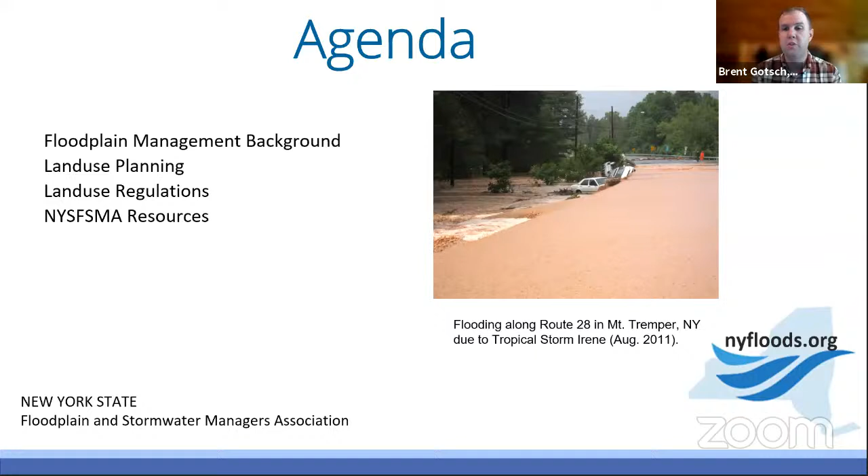The New York State Floodplain and Stormwater Managers Association is an organization of multiple professions working together to make New York State safer, more flood resilient, and better prepared for flood risks facing the state. We really are a diverse organization made up of multiple professionals. We have planners, engineers, education outreach specialists, surveyors. I'm sure there's many others I'm forgetting, but these, in many ways disparate yet collegial groups come together to help the state be more resilient in the face of flooding and better prepared with stormwater management. We do this through several avenues.

We provide training, which I'll talk about in more detail towards the end of the presentation. We also are an advocacy organization. We advocate for good, solid science-based and evidence-based floodplain management policies. We have position papers and write letters to elected officials to encourage them to promote policies that lead to good floodplain management. We do outreach similar to what we're doing today, with other organizations, to talk about why this is an important issue that should be on everybody's radar. And finally, we collaborate with many different organizations and groups of people, all with an eye towards making sure the state is resilient in the face of increasing flood risks.

So why do we do what we do? Well, first and foremost, flooding is the most common and expensive disaster in New York State. It's actually the most common disaster in the entire country. I like to say the wildfires out west, the tornadoes in Tornado Alley, earthquakes—those are kind of the sexy disasters. They get a lot of the press. But flooding, far and away, is the most common natural disaster you're going to face anywhere in the United States, and particularly in New York State.

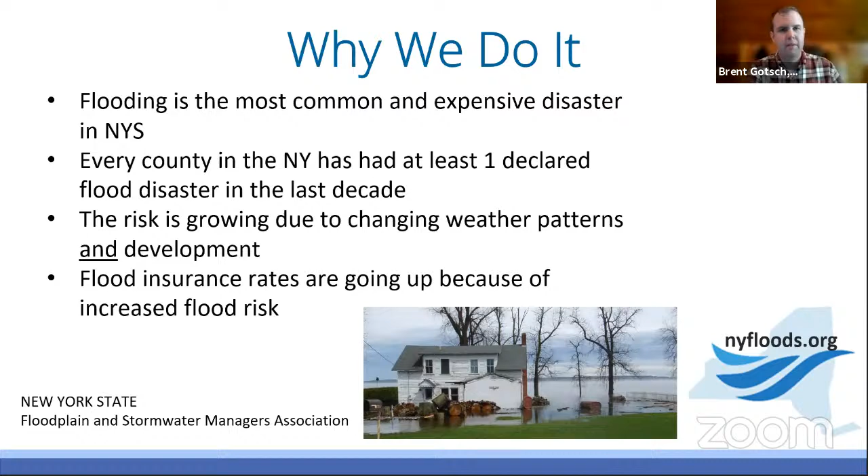The National Climatic Data Center says that the Northeast, of which New York is one of the states, has experienced a 71% increase in very heavy precipitation events. Again, that's a result of climate change. We're having increased hurricanes, larger category hurricanes dumping precipitation on us. You also have rain-on-snowmelt events in the winter and early spring months causing these issues, and heavy thunderstorms even in the summer. These increased precipitation events are really swelling our rivers and streams and making flood events more frequent and common.

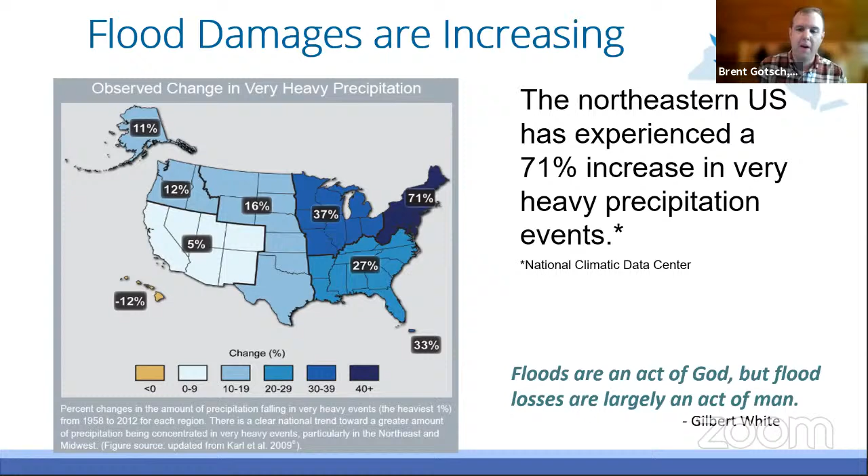But the losses, that's totally on us because we have chosen to put our development into our floodplain areas. Now, we can't go back in time and tell all the folks in the 18th, 19th, and 20th centuries not to build our built environment in our floodplains. We can only go forward. But as we go forward, we need to make sure that we make good land use decisions. That's something we'll be talking about as the presentation goes on.

Why is this? This has to do with more severe storms and the development patterns, the increasing development pressures we're facing, which tend to put a lot of our built infrastructure on nice, flat, developable land—which often tends to be floodplains, riverfront property, waterfront property. As many of you know, that's very expensive property. That's where developers want to build. That's where you make a lot of profit.

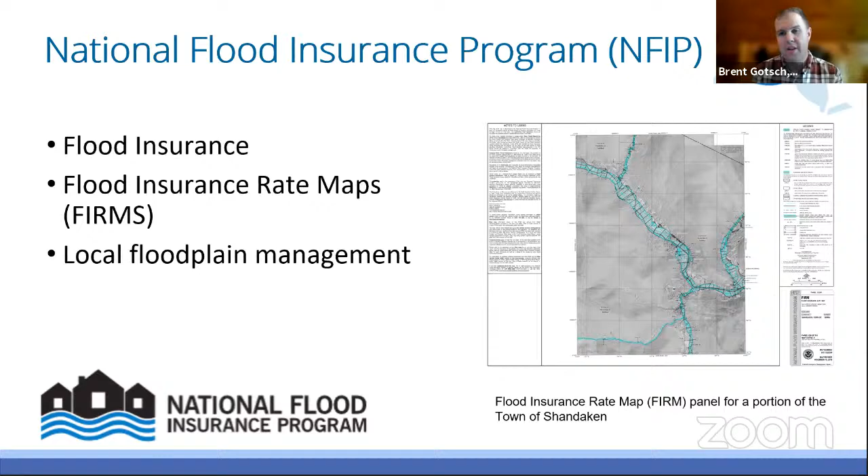The flood hazard maps, or flood insurance rate maps, map the 1% annual chance, or 100-year, floodplain. We try to get away from the term '100-year flood' because I think it confuses a lot of folks. Quick story: in my hometown, the last big 100-year flood occurred in 1928. My grandfather was a little boy at the time but remembers it vividly because it basically wiped out the whole town. When I talk to old timers in the community, they always say, 'we don't have to worry about a 100-year flood until 2028.' I tell people, well, 2028 isn't that far away, but that actually has nothing to do with it.

This is really talking about statistical probability. A 100-year flood has a 1% chance of occurring in any given year. So essentially every year that rolls up, you roll your dice and see what happens. You can have a 100-year, quote unquote, flood happen multiple times in a given year or over several years back to back. Again, this is simply a way of talking about probability. The term floodplain managers like myself, Janet, and John like to use is '1% annual chance,' which I think gets the point across a little better.

The thing about these maps is they show the extent of the floodplain in the mapped areas, but they don't show runoff from new development. If you have new development, you have lots of impervious surface, so water can't infiltrate into the ground. It runs right off into the rivers and streams and can cause inundation in those areas. They also don't show ditches or debris blockages at road and stream crossings. In the area I work, we have a lot of undersized bridges and culverts, and ditches that get clogged with debris, which can cause flooding and a backwatering effect at those locations.

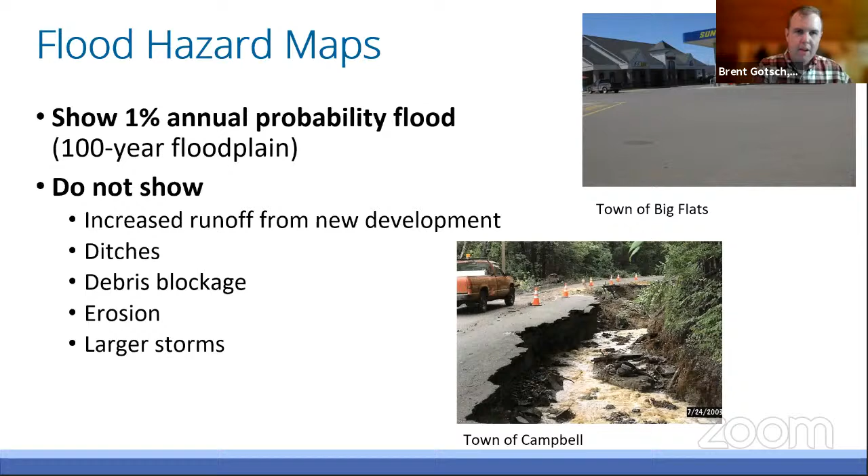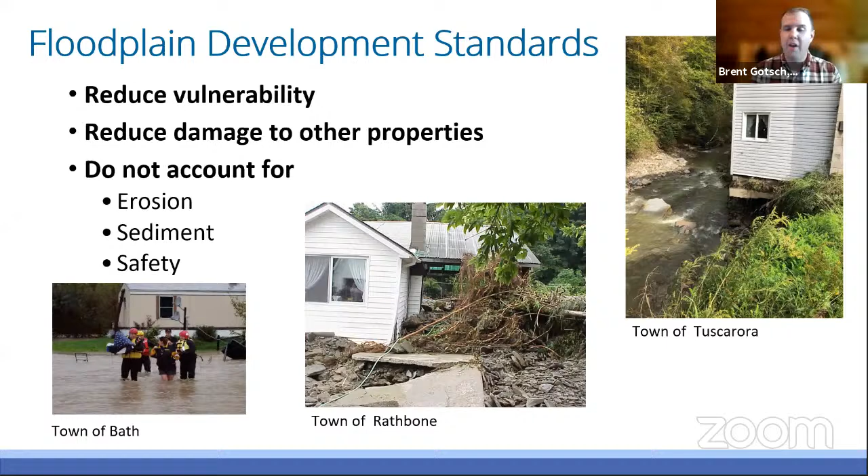Depending upon the velocities of the water, you can move some pretty big material. You can have situations like this where large amounts of sediment can move in and impact structures as well. But again, the whole purpose behind all of this is for safety, right? Safety for human life and also for the properties that are affected.

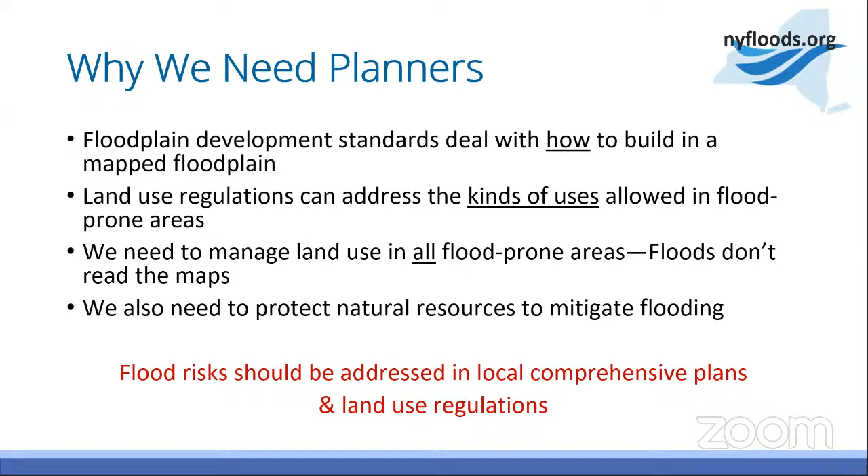So government has an affirmative duty to prevent harm. The most important reason that local governments exist is to protect health, safety, and welfare. This sometimes gets sidelined because we're focused on potholes or assessments or whatever the hot issue is at the moment, but we shouldn't lose sight of the issues that relate to safety.

And if it rains in your community, then those safety considerations should include integrating flood concerns into local plans, into your policies, practices, any regulations you have, any investment decisions. And by addressing flood resilience, we're improving safety, but we're also saving money in the long run. So that's also part of your fiscal responsibilities for protecting both public and private investments.

So what tools can we use to reduce flood damage and also to protect beneficial natural features? Brent talked about the minimum standards for floodplain development that are in our local laws. Each municipality that participates in the program has a local law, and those standards are also in the building code. That's really important, but it's only a start, because those are standards for high-risk areas, and they're minimum standards.

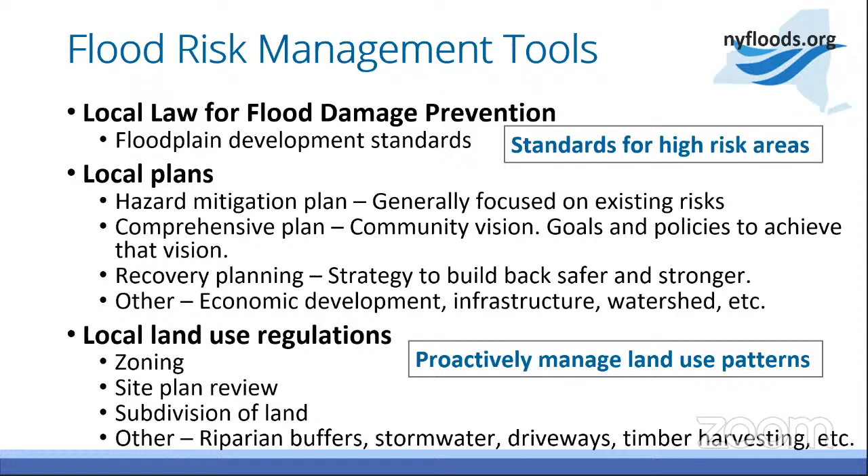For the next slide. Scope and detail in comprehensive plans varies widely, but these are the basic functions of the plan. A comprehensive plan should identify and document the community's desires—how do they relate to, what are their concerns about a wide variety of local issues? We should be sure that flood safety is included in those issues addressed in the plan.

Once a comprehensive plan is adopted by the local governing body, it becomes a blueprint for developing or revising any land use regulations. So it is a legal document—it's the basis that supports land use regulations. It's required in New York State for adoption of zoning laws. The comprehensive plan itself isn't directly enforceable for individual land use actions, but it's the foundation that we build on.

Next slide. We all want our communities to be safe and sustainable, so comprehensive plans should include a roadmap for promoting safe development practices and patterns. There's a list of a few principles to keep in mind as we go through the planning process.

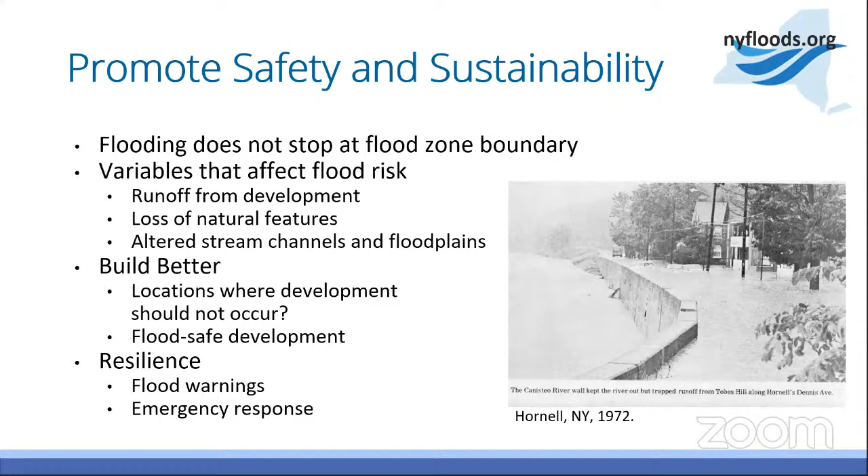Next. Another good principle to keep in mind is called no adverse impact. This was developed by the Association of State Floodplain Managers. It's the principle that it's not okay for the actions of one property owner to cause any adverse impact on other property owners. You shouldn't allow activities that will increase flood heights or flood velocities for neighboring properties. So when approving development, you not only need to think about how that development will be protected from flood risks at that site, but also whether there's potential for it to adversely affect neighbors.

So it's a two-stage process. One is to try to identify the impacts, and that's easier said than done—it depends on the quality of our modeling and the local expertise about drainage and flooding issues. The other is to either prevent or mitigate those impacts so that neighbors aren't harmed.

That doesn't mean you don't allow the proposed project, but when you allow it, you make sure that it doesn't harm the neighbors.

Back to comprehensive planning. There are opportunities to address flood risk during each step of the process. Planning always starts with fact finding, or good planning does. This is an opportunity to document existing conditions, future trends, potential problems, and any other particular community concerns. The planning committee will then incorporate this data and the public input to develop goals and objectives.

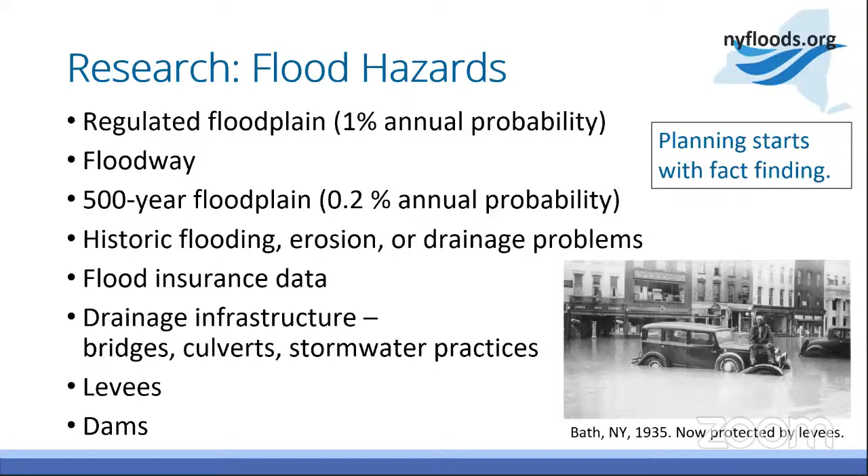Natural features are also important, and more often we do include most of these things in a comprehensive plan. But there are additional hints of areas that may be prone to flooding, particularly if we get into streams that may not have mapped floodplains, and wetland areas.

So we obviously want to map lakes, rivers, streams. We also want to think about mapping areas where we're getting flood protection benefits, either undeveloped floodplains or riparian buffers that are slowing and storing floodwater and benefiting the rest of the community. Highlight those.

Slopes are important. We should identify areas with 15 or 25% or greater slopes. When we develop or harvest timber on these areas, those projects should receive extra attention, because uncontrolled water goes down the hills quickly, often causes erosion, flash flooding if it's not managed appropriately.

Should identify sensitive groundwater resources. Sometimes the areas that we warrant special protection for wellhead protection purposes, source water protection purposes, may be the same as the areas that warrant special protection because of the flood risks also.

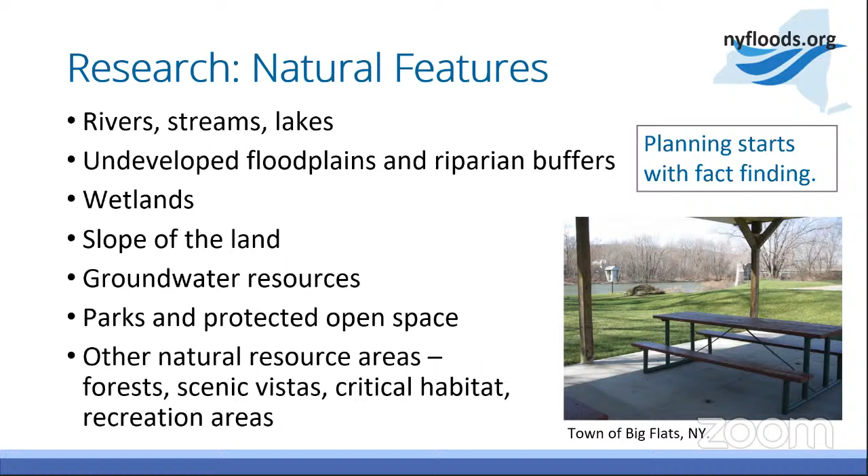Parks, trails, ball fields, recreation areas. These are generally great uses for flood-prone lands. So while we're discussing areas that are unsuitable for other types of development, we should also be discussing what are our recreational needs, and can those be met in our flood-prone areas.

Public engagement is essential for developing a good comprehensive plan. We should also include anybody who may have a role in implementing the plan's recommendations, get them involved in crafting the plan. If there hasn't been a recent flood, flooding may not be on the radar of community officials or the planning committee. Public may not think to put their flood concerns into the survey you send out, but that doesn't mean that you shouldn't address it, because local government is responsible for public safety, even when residents are blissfully unaware of the risks, and even when residents really don't understand strategies for minimizing those risks.

So to get buy-in for any strong flood resilience measures you want to take, you'll first need to think about educating the community, both the public and community officials, about the issues. When you do that, use lay terms, focus on the big issues, don't get bogged down in technical details, save those for offline moments when you have limited time with the public.

So focus on what the risks of flooding are local to your community, what's the potential for flood damage, are there safety issues, are there roads that are particularly prone to washing out, and what are the key strategies for managing those risks. And use maps. When data and information is on a map, people see it. They're more likely to think about it.

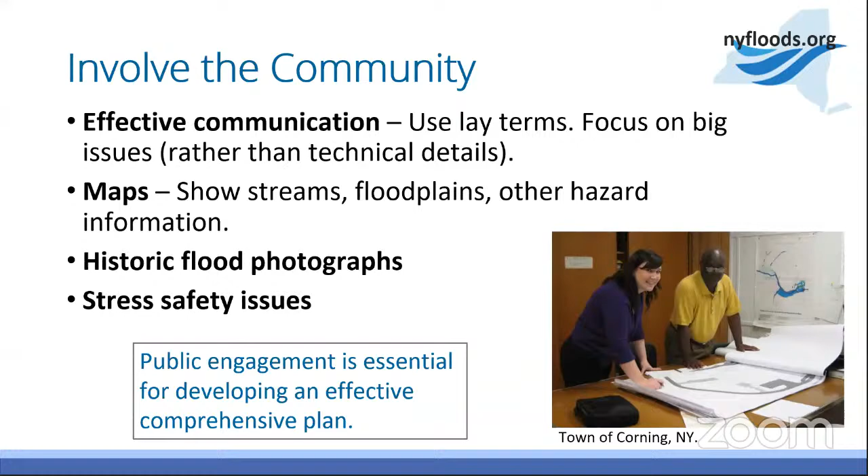So we've identified our hazards, we've involved the public, hopefully we've educated the public. So what are we going to do about it? I like to organize the flood resilience strategies into these 4 buckets.

Your planning committee may not have the technical expertise to really develop great strategies. So invite soil and water districts, invite emergency management, invite other subject matter experts to help you figure out what to do about your flood risks and what makes sense for your particular location.

So the first strategy is to manage water where it falls: promote stormwater management and green infrastructure practices, maintain those once they're installed, and pay special attention to runoff and erosion on steep slopes. You want to manage runoff near where the rain falls, and in a way that prevents any adverse impacts to neighbors and downstream areas.

Make room for water. When we get more water than fits in a stream or river channel or the normal water level of a lake, we will have flooding. It's natural. We need to anticipate that and set aside those highest risk areas.

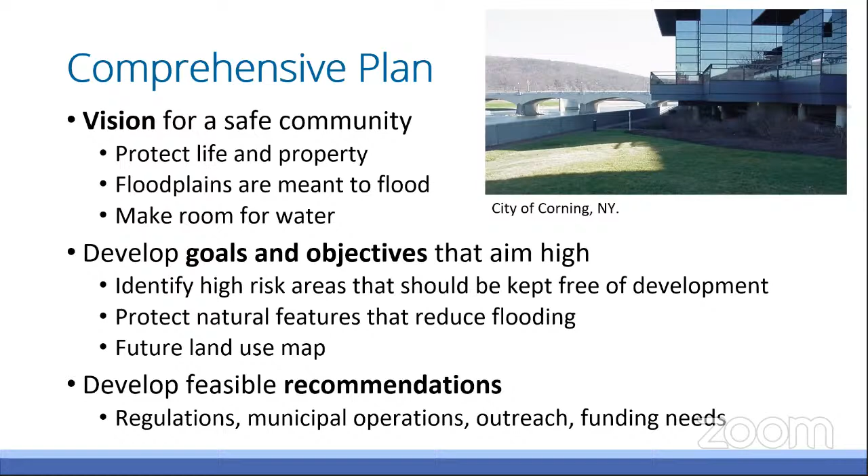So with that, I will turn it over to John to talk to us about land use regulations.

Thank you, Janet. So land use regulations through police power—these are the tools that communities have at their disposal as part of the development review and the overall planning process. The big item on this is, through these regulations, you are regulating different uses or the individual districts. But the big reason for these regulations overall, especially when dealing with floodplain management, is for public safety. And sometimes that gets missed when trying to explain to the public that these rules and requirements are in place for their benefit.

And making that known is very crucial throughout any process. As everybody already knows, New York is a home rule state. So local governments have the authority over proper affairs of government. They're also able to place restrictions upon different types of uses throughout the communities, and that's something that I'll get into at the latter part of the presentation.

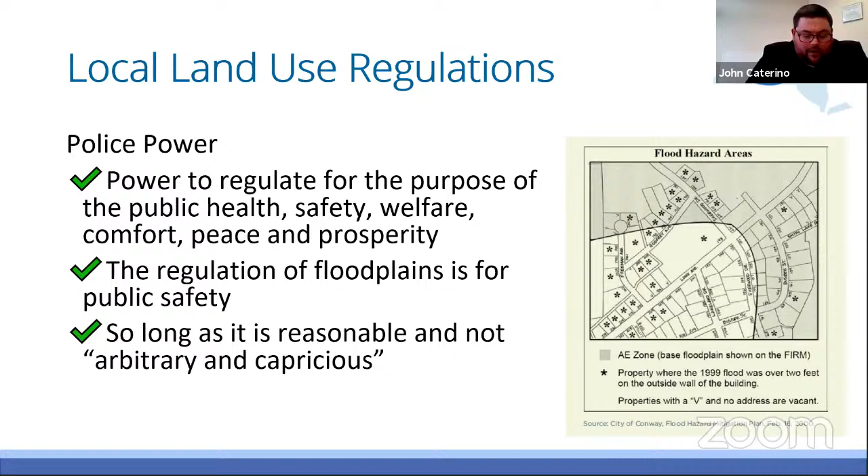Getting back to the police power that communities have at their disposal, this has been defined generally as the power to regulate persons and property for the purpose of securing the public health, safety, welfare, comfort, peace, and prosperity of the municipality and its inhabitants. Next slide, please.

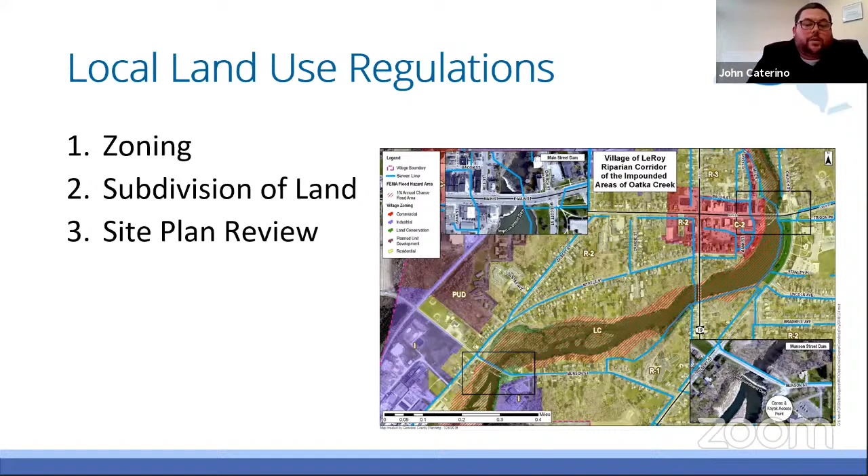So the main tool that we have at our disposal is zoning. And as many of you are already aware, zoning is the way in which land in a municipality is used and developed.

It outlines what can be done in certain zoning districts, as well as having bulk requirements in terms of density and setback. The goal of zoning is really to carry out the municipality's long-range land use objectives, whether it's recommended or outlined in a comprehensive plan.

Zoning is a tool that courts have supported over time, going back to the 1920s in the Ambler Realty versus Village of Euclid, Ohio case. The courts have said that communities have the authority to use zoning from a land use perspective in their individual communities.

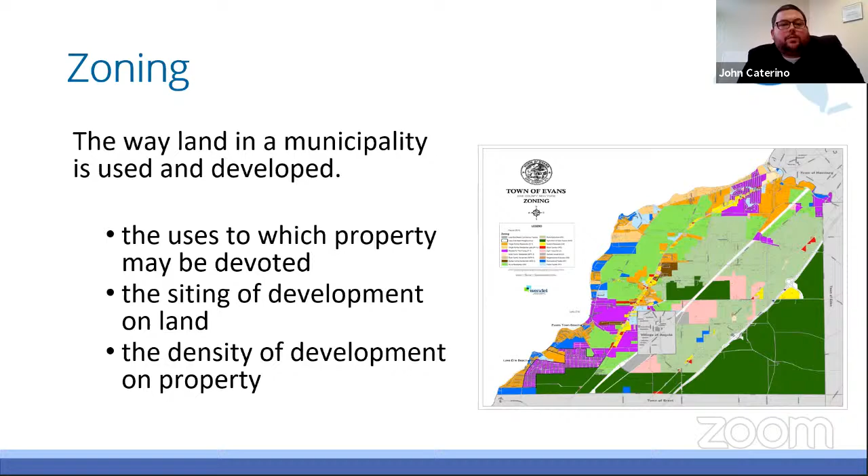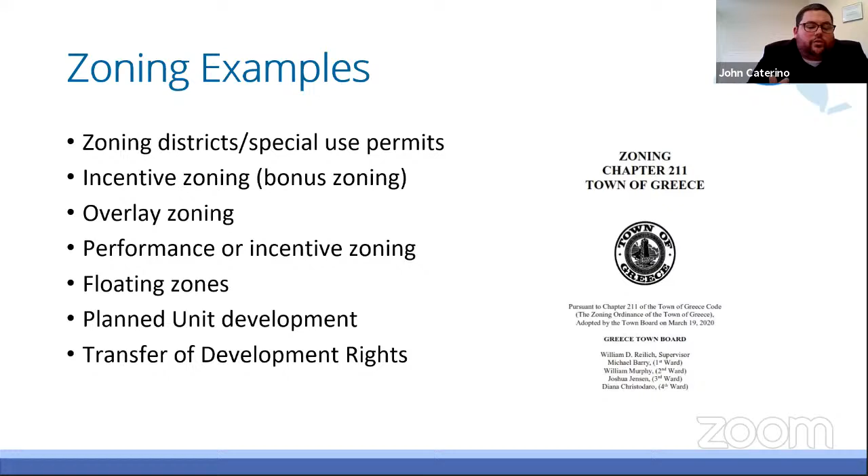In terms of zoning examples, every community is going to be different. Some communities will utilize certain regulations in their zoning ordinance. To the left of the screen is just a list of a few that certain communities will have at their disposal—incentive zoning, the use of overlays, floating zones, or planned unit developments, PUDs. So every community is going to be different on how they implement zoning and how it's utilized.

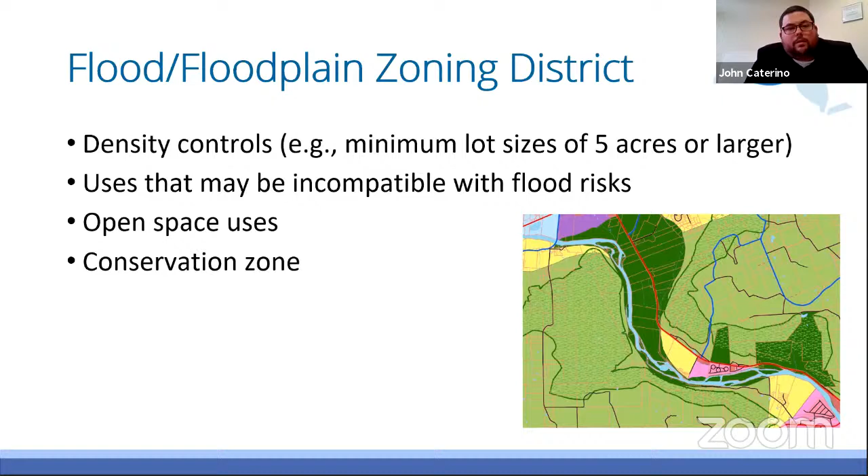It's utilized to regulate vulnerable areas to flooding. For permitted uses, it allows agriculture, playgrounds, and recreation areas—the type of low intensity uses you would envision in a floodplain or flood-prone area. You do not want high density residential or commercial, where they could run into issues down the road if a serious event were to occur. The town of Wheatland also allows special exception uses, such as private recreation areas and nonprofit membership clubs—low intensity uses so that if a flooding event occurred, there wouldn't be significant loss of property or individuals.

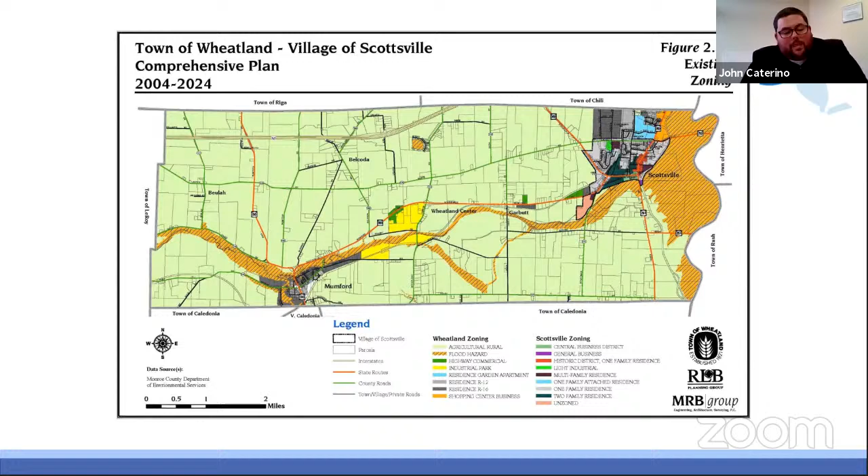Buildings are prohibited except for small structures on parcels larger than 10 acres that are necessary appurtenances for agricultural, recreational, or open space use, such as a restroom or shed. Recreational vehicles, trailers, and portable toilets must be adequately anchored to resist flotation. Open pavilions are not considered buildings and are thus permitted. Filling, storage, pavement, and other encroachments on natural drainage and flood flows are prohibited in this conservation district. So you're really trying to minimize impacts and minimize loss of property or individuals in these districts.

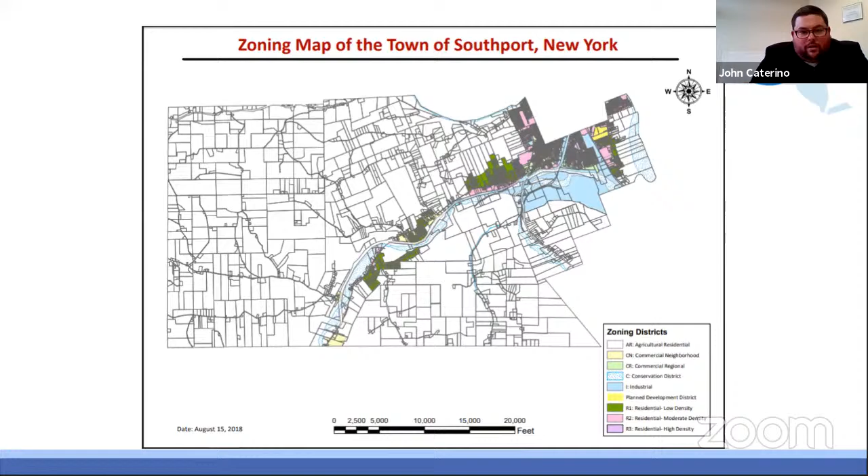Special permits, also known as use permits or conditional permits—every municipality outlines them a little differently—are a flexible technique allowing a municipality to review a proposed development project to ensure it is in harmony with the zoning and will not adversely affect the neighborhood or adjoining areas. In most municipal zoning regulations, many uses are permitted within a zoning district outright, with no discretionary review of the proposed project. Certain uses, on the other hand, require closer examination based on special review standards. A use may be allowed through a special use permit using standards set forth in the zoning regulations.

This could be a type of use of higher intensity where it will generate additional traffic to a certain area, or produce a lot of noise, or, since we're talking about floodplain management, it could be a use of more intensity that leads to more structures being located within the floodplain. So, it's just another tool that communities can have at their disposal to regulate development in the floodplain or these flood prone areas.

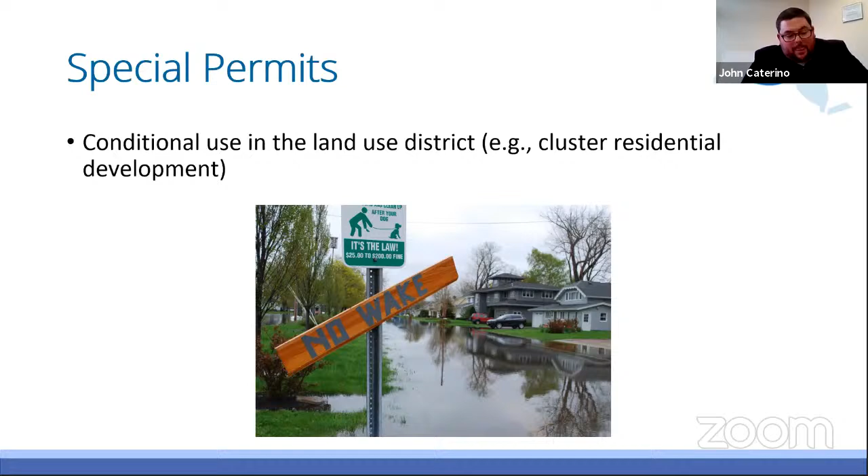Overlay zoning. A lot of communities, especially in rural areas, utilize overlay zoning districts, a lot of times you'll see them in the form of EPODs, or environmental protection overlay districts. This is something a community could use, whether you have riparian areas or just flood prone areas in general, where underlying uses could be allowed, whether it's single family homes or recreational activities. With these overlay zoning districts, it allows additional restrictions or requirements, so it can be another tool utilized by the community to control development in the floodplain, and, as Janet alluded to, not creating any adverse impact to adjoining properties or adjoining areas of the municipality.

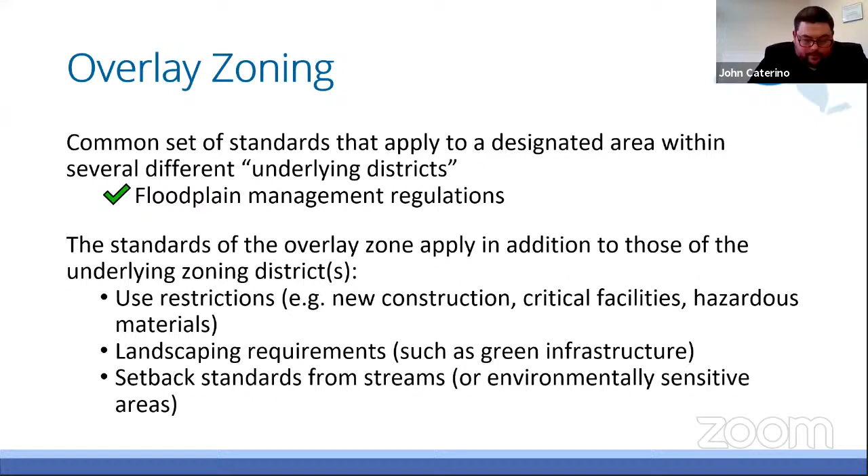This is just an example: if you were to have an overlay district such as an EPOD, you might want it set up to require green infrastructure or low impact development techniques to minimize any impact to adjoining areas, whether it's avoiding disturbance of a stream bed that might allow for additional runoff or increase the flow of a stream and impact downstream areas. You could reduce impervious cover by utilizing green infrastructure techniques to control runoff, so you don't have sheet flow, say, across a parking lot that could eventually go into single family homes, multifamily complexes, or even commercial buildings, especially in a tight, compact Main Street area of a town. The big thing is you're managing the development - you're not saying development can't occur, but you want to manage it so it doesn't impact those adjoining areas.

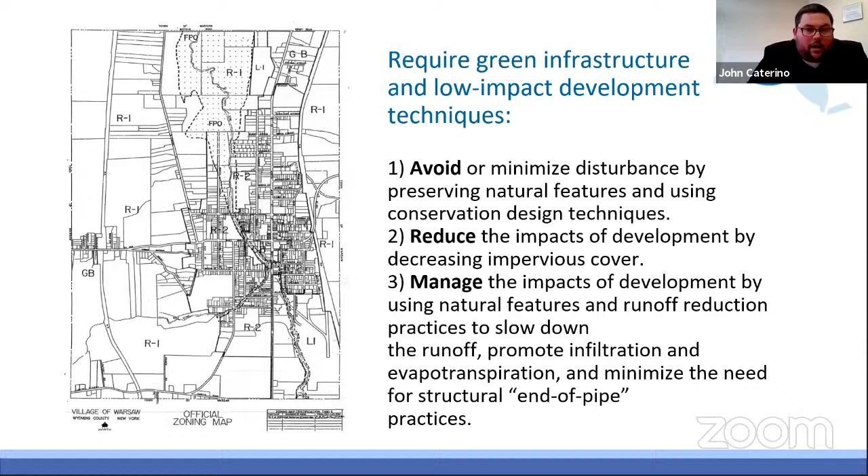Incentive zoning is another item some communities have at their disposal, some don't. I believe in Monroe County I know of two communities that have incentive zoning on their books, but every community is different. Incentive zoning could be a good tool to control development in the floodplain where, on a project, you might allow a higher density of residential or commercial uses, but in return you receive a certain area of that development set aside for floodplain management, storage, or conservation purposes. So this is just another tool communities could utilize to control development in the floodplain and not cause impacts that could be seen during or after a severe event.

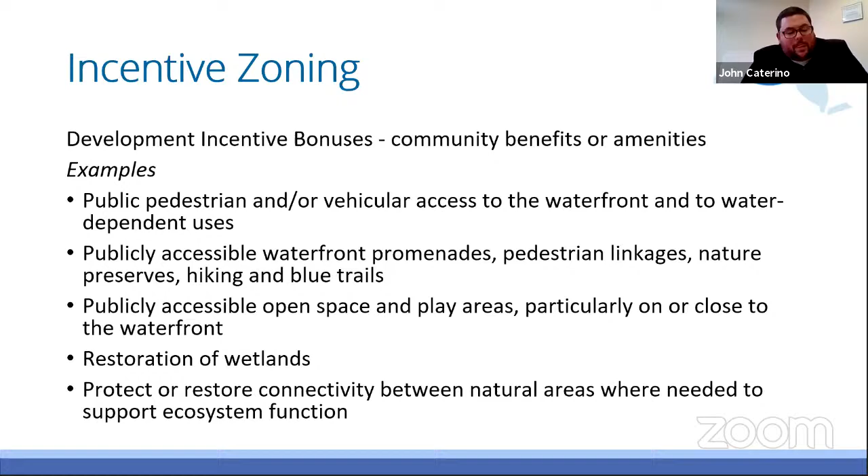Floating zones are another tool communities can use at their disposal. Pretty much what these are, as many of you already know, are zones outlined in your zoning ordinance, with requirements, but they don't show up on your zoning map. A lot of times they can only occur with a rezoning of a particular property. This could be utilized in a way where, if an individual wants to develop a portion of property, maybe for mixed use, as part of that rezoning process and having that zone implemented, they might set aside a certain amount of land for floodplain management, conservation, or recreational reasons, where there really isn't serious impact to the floodplain or adjoining areas.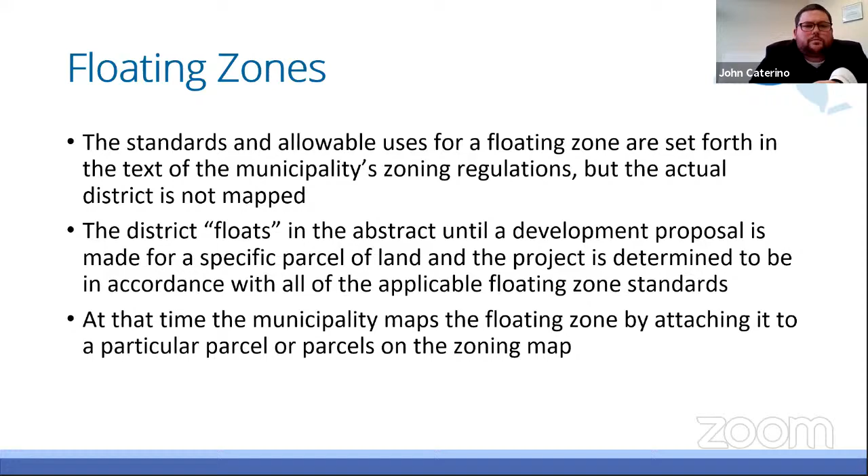So, like I said before, it's another tool that communities have at their disposal, another way where you can allow for additional uses that might not already be called out in your ordinance or as underlying permitted uses. Next slide, please.

Planned unit developments, also known as PUDs. The PUD concept allows for a combination of land uses, such as single and multiple residential, industrial, and commercial on a single parcel of land. It also may allow a planned mix of building types and densities. Similar to incentive zoning, a PUD could be utilized to allow for higher densities of residential, commercial, or industrial on a property, but in return, you can get areas of that property preserved for floodplain management or conservation purposes.

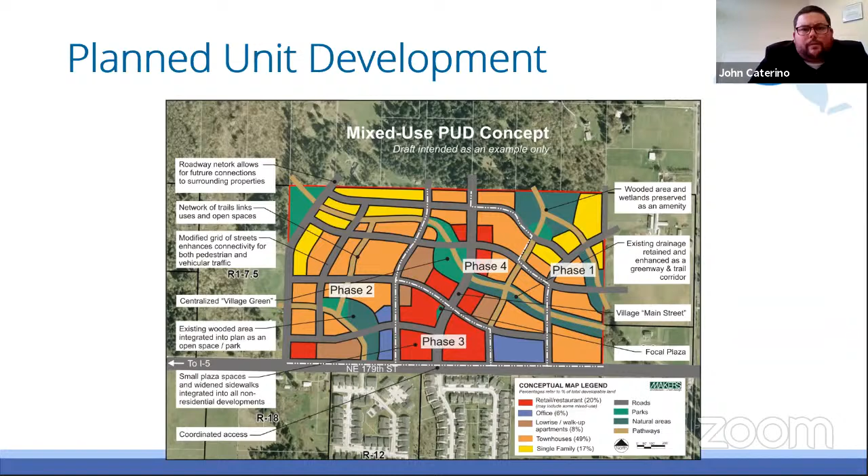This is one that not many communities have. I know the town of Greece, we have no PUDs in the town, but other communities do. I know the city of Rochester utilizes PUDs a lot in their land use regulations. Next slide, please.

Transfer of development rights. This is another tool that you see more predominantly in rural areas, or utilized a lot by local land trusts. But pretty much it's a way of sending development rights from one parcel to another parcel. A lot of times we'll see it in more rural areas. Not many communities have it.

This example is from the town of Smithtown, in Long Island. Long Island sits atop 3 aquifers that are the sole sources of drinking water for the island. To protect drinking water from contamination, Suffolk County regulates the amount of wastewater that can be discharged on properties. In this area of the county, owners have the right to generate 300 gallons of wastewater per day per half acre. However, some owners would like to use their properties more intensely and others less intensely. In such cases, the county allows owners to transfer rights from one property to another. So, getting back to what I just mentioned, you're giving rights that might not already be allowed on one property, from another.

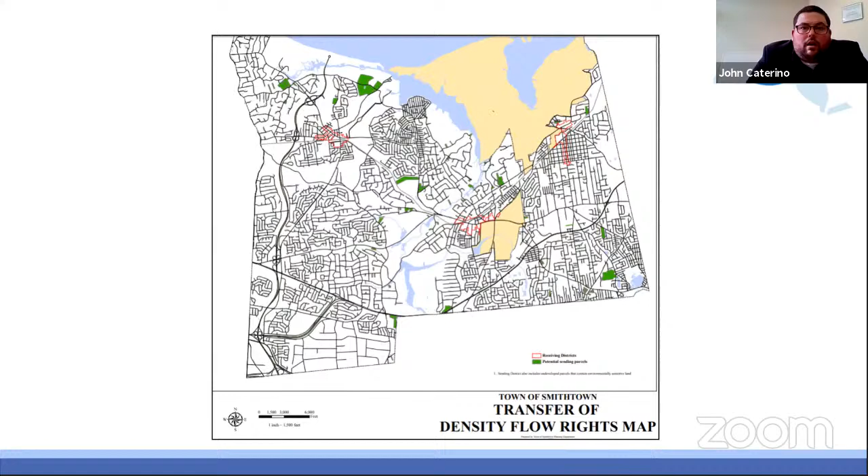Next slide, please. Subdivision of land. This is a regulation that probably every community has in their ordinance. It's about how the land is intended to be used, and ensuring that the development of that land occurs in an orderly pattern. A subdivision plat contemplates division of one tract into a number of smaller lots with eventual separate ownership of each lot. Before conducting subdivision plat review, a municipality must define the term 'subdivision' to establish the number of lots, blocks, or sites for which subdivision review will be required.

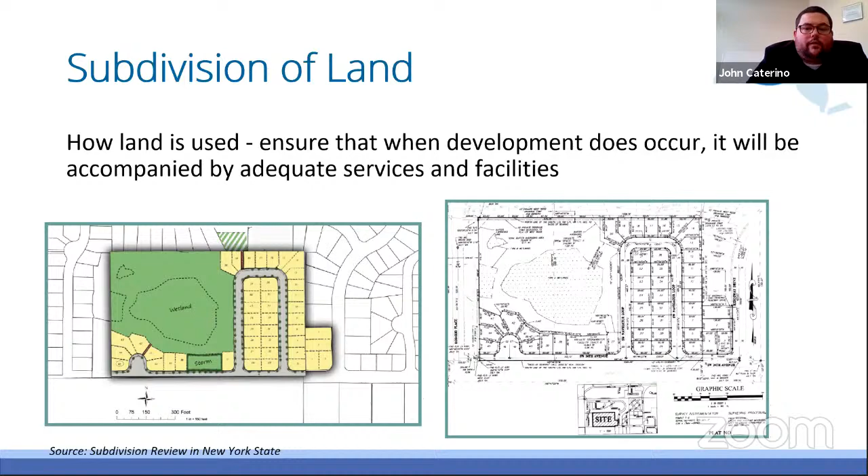A lot of times for subdivisions, it will be a 2-step process: the preliminary plat, which, say you have 50 acres of land, will show how that land will be developed, including the road layout, geometry, and the individual parcels to be developed. Then you'll have your final plat, for when a developer is ready for construction, where they come in for approvals for those individual sections. It could be a 1-section subdivision or a 10-section subdivision, depending on how large the property is. Next slide, please.

And then common subdivision standards. Every community is different, but there's a lot of items that you'll see on a subdivision map. The items outlined in red are ones you can consider when it comes to floodplain management, like the lot layout. Do you want lots that back up to a stream, or do you want those set aside as open space?

Same thing with the street layout. Do you want streets in close proximity to a stream, or do you want to leave them set back further, so if there's a high water event or flooding, there's no impact to EMS services or property owners entering and exiting the street. So all these items are things we need to consider as part of the planning process, and planning boards have to look to when they grant approvals for subdivisions.

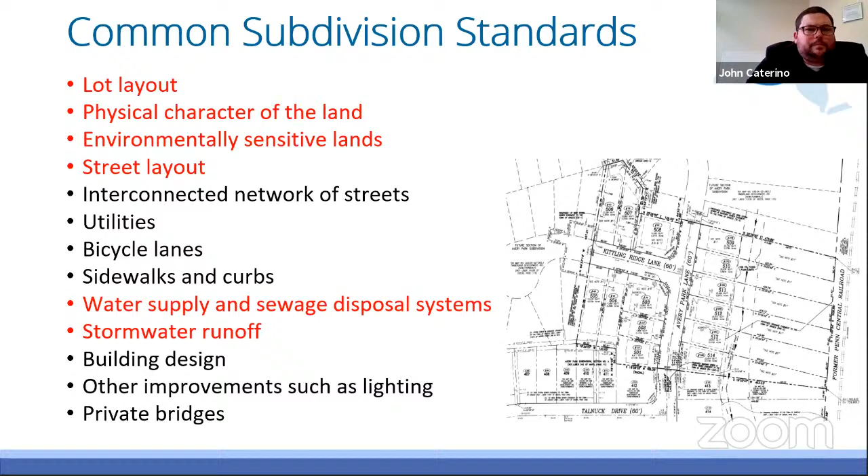Then cluster development or conservation subdivisions. Like I said before, some communities have these, some don't. But if your community doesn't, New York State town law does have requirements for cluster subdivisions if you were to implement it. The purpose of these is to try to allow for the development of certain areas or properties while maintaining the environmental resources or flood prone areas of these properties.

Every municipality is going to be unique on what their objective is, whether it's for open space you'd like to see as recreational uses, or to conserve riparian areas for floodplain reasons or storage. So every community will be different on how they utilize this type of regulation if it's in your ordinance.

For the town of Greece, we have our own standalone cluster development subdivision requirements, much of which is based on state town law, but we also have additional requirements where it requires a concept level plan to be reviewed by the planning board before it could even be considered a cluster subdivision and for the project to move forward.

You could also require that the number of lots on a regular plan per your zoning ordinance—say a 50-acre lot can be developed into 45 lots—through the conservation process, you can't have any more lots than what your code would require. So it could be a tool to allow for needed density on a development, but isolate those densities into certain areas while conserving open space on the property.

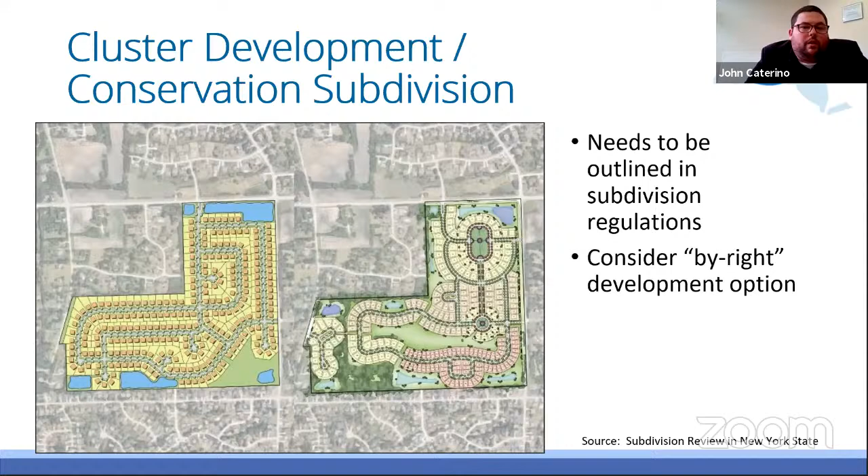Next slide, please. And then procedures. As municipal planners, that's the one thing we're kind of tied to—making sure that we follow our procedures. If there was ever an instance where a decision was challenged, one of the first things attorneys are going to look at is whether you followed your procedures, whether it's SEQR or your local law.

So a wise developer would include due diligence in the development process, and the community subdivision process may include a step of a pre-sketch plan meeting. This can be a concept level plan meeting where a developer comes in front of your planning board or planning commission and says, before I make full application, this is what I'm thinking in terms of layout—what are your initial thoughts, to staff or otherwise. It's a good way to potentially prevent issues down the road in the early stage of a project.

And then, much like the pre-sketch plan meeting, submittal of a sketch plan may not be required as part of the subdivision review process. However, it can be very effective as a low-cost planning tool used by the developer in early meetings with community officials about the feasibility of the proposed project, in conjunction with the community's regulations or design requirements through the permitting process and on to implementation. Many of the facts and findings from the due diligence process are included in the sketch plan itself or used in preparing it.

And then the preliminary plat should be used at a suitable scale with accurate drafting so that all the characteristics of the final plat can be anticipated. So getting back to that preliminary plat, you want to see the road layout and geometry, how utilities are going to be handled, how stormwater management is going to occur—all those small items that get put together into an overall plan.

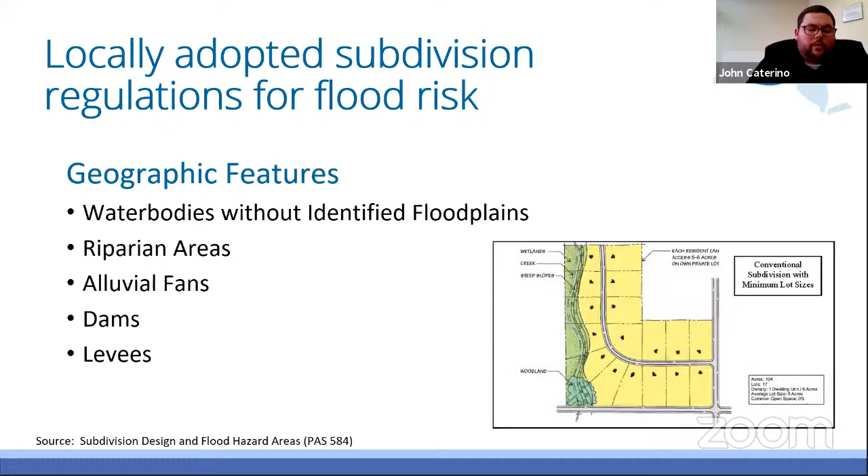Getting back to subdivision, the layout and design is important, as well as the infrastructure. You're showing where these items can and can't go, and how they would interact with the as-built environment. So for the local road system, if you're in an area that is highly flood prone, maybe you want to design the geometry of the road network to try to avoid those areas.

So it does allow for ingress and egress for individual property owners in the event of an incident, or same thing with utilities. Having those in areas that are maybe above flood elevation or away from flood prone areas, so if flooding was to occur, the utilities aren't going to be damaged or compromised, or even just to maintain those utilities, they don't have to worry about high water levels when work would have to be performed.

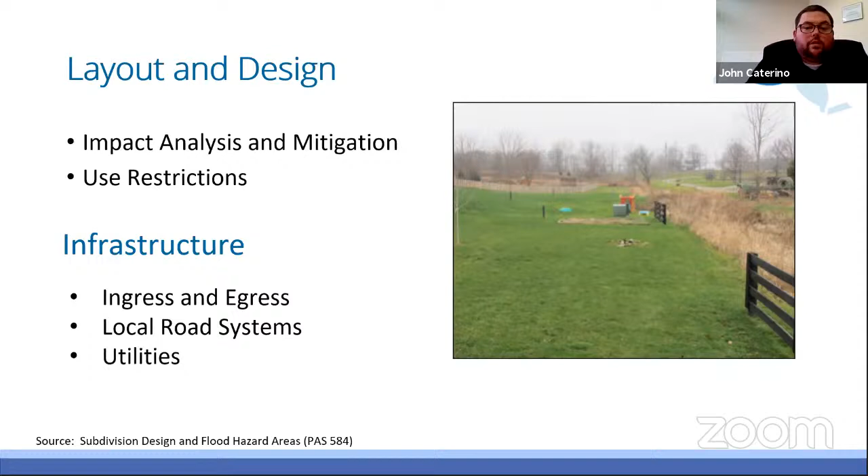So non-structural and structural, these get into how we can develop these areas and different items to consider. You can avoid land disturbance and pavement and other impervious areas adjacent to streams. You can ensure buildings are above the natural elevation, above the regulatory floodplain, or you could even make sure that they're so far back from the floodplain.

Your local ordinance could say, if you want to build a building, it has to be at least 50 or 100 feet from the special flood hazard area. Floodplains don't end where the map says they end. You can still get possibilities of sheet flow and other items like that.

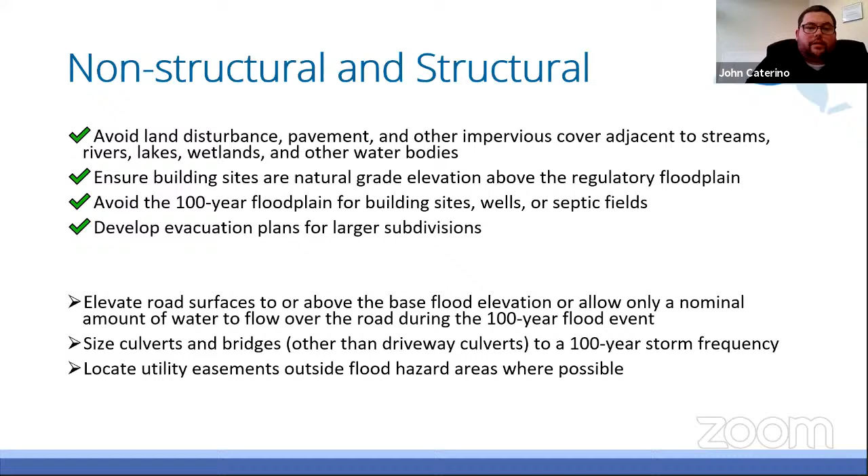And then in terms of structural, you can elevate road surfaces, you can size culverts appropriately to handle that frequency of a 100-year event, or even upsize those culverts to handle the additional flow that they'll see in an event if it was to occur. Next slide, please.

And then watershed management. This is something that can be utilized not by just one individual community, but by a grouping of communities. A lot of streams, creeks, rivers don't just pass through one municipality. So watershed management could be a tool where, say, 5 communities decide to partner up through an intermunicipal agreement and say, okay, anytime we have a development project that's going to occur in one of these watersheds, each community will have the ability to review that project and provide comment on it.

In a watershed, every community's going to have a different view of it, whether you're upstream or downstream. So this can just be another tool that can be used at a comprehensive level to minimize impacts on up and downstream communities as it relates to development projects.

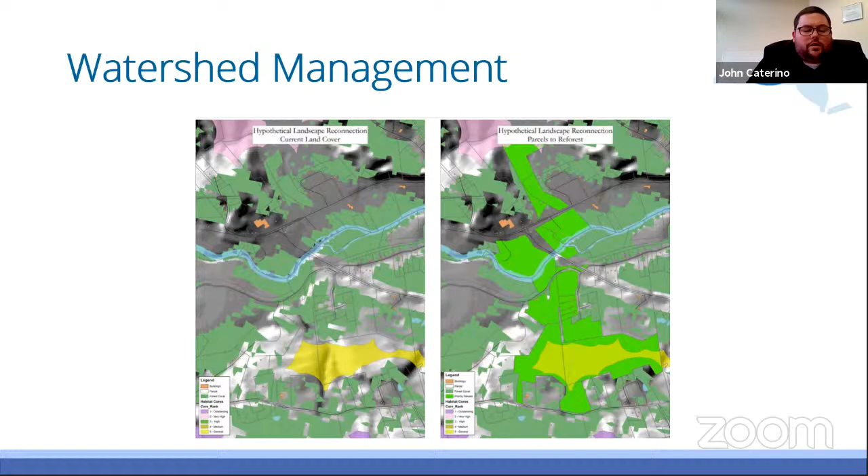Next slide, please. And then site plan review. This is the one that we deal with probably the most in the town of Greece, where you're going to get a component of zoning ordinances or separate enactments. But pretty much, you're reviewing the individual site and how it's going to be developed.

If you're reviewing a site plan for a property that's in a flood-prone area or adjoining a FEMA floodplain, there are items you want to make sure are implemented or delineated on that drawing, or discussed as part of the planning process. If there is a 100-year floodplain, you want to make sure you have those base flood elevations and that floodplain delineated. From there, you can mold the plan a little more by saying, okay, we know where those zones are. Now let's look at everything else. Does it make sense to have an underground parking facility in that area, or does it make sense to have buildings right on top of it? These are just tools we can utilize to allow for development in these areas, but also to protect them from any significant events.

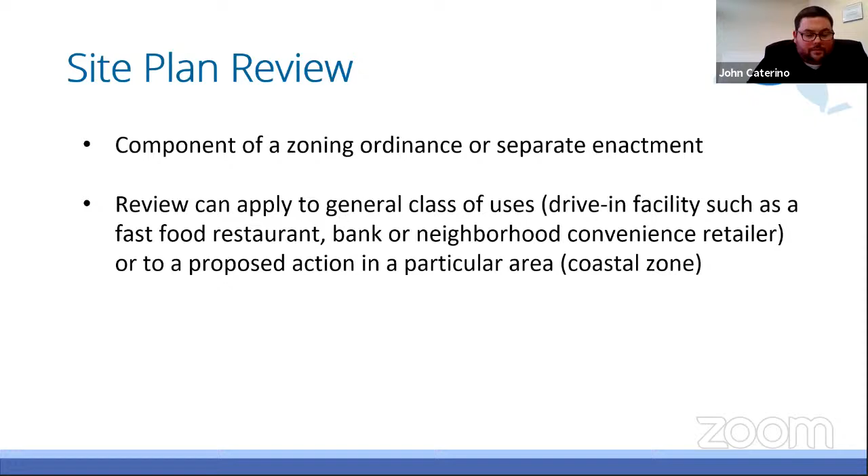As I mentioned before, it illustrates the intended design, arrangement, and use of the lands to be improved. We'll describe the proposal's physical, social, and economic effects on the community. From the physical aspect, you'll have a change in a particular property—this could be a greenfield site that now is going to be redeveloped into a strip plaza. Or from an economic standpoint, this could have been vacant land assessed at a certain dollar amount, but now that it's being developed, it will receive a different assessment where it provides tax base to the community. These are just items to consider as part of the planning process.

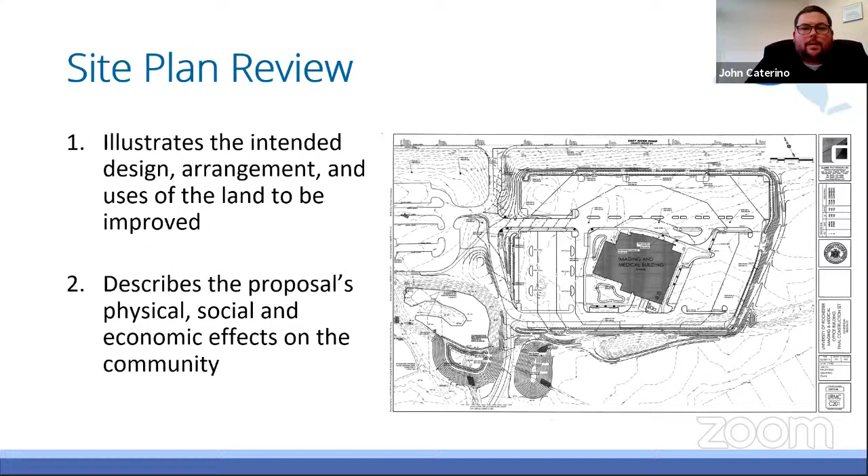Tying it all together, whether it's site plan or subdivision, these are typical development considerations. Means of access—where are your entry points? Are they off a main thoroughfare, or off smaller subdivision roads? Landscaping—do you want to be filling and grading in areas adjacent to floodplains, which could impact runoff or increase flow and velocity, sending additional water downstream? Buffers—do you want buildings setback not just from property lines or asphalt, as many zoning ordinances do, but with a requirement that says in our community you'll be at least 50 feet or 100 feet away from the top bank of a stream, or whatever is decided as more appropriate.

Architectural features—if you're in a flood prone area, do you want to have items in place such as vents or dry flood proofing? So if an event were to occur, buildings wouldn't be damaged, or there wouldn't be a loss of life, or something along those lines. Getting to the final bullet point, it all really comes down to protecting the health, safety, and general welfare of the community.

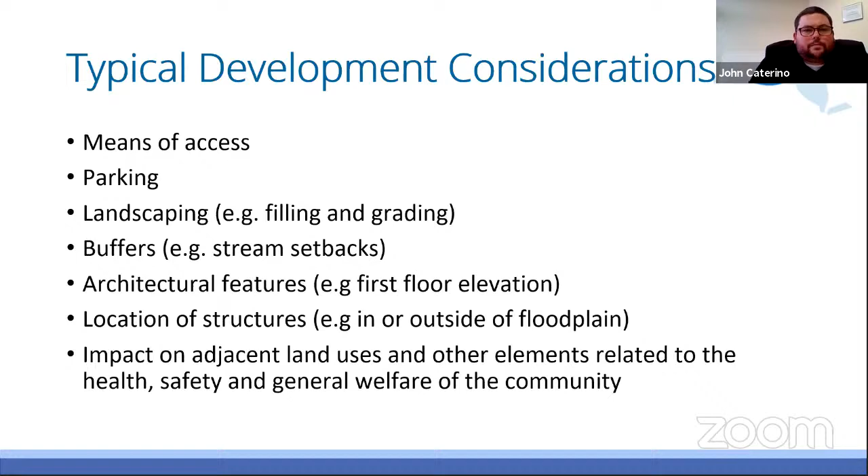Review standards related to flood safety—these are things that should be taken into consideration as it relates to development. The first step in reducing runoff is to avoid impacts to the site as much as possible by preserving natural features in undisturbed areas. So maybe instead of having a 50 spot parking lot with nothing but asphalt, you include some green infrastructure or rain gardens—something where you're controlling runoff from going downstream or into another area of a property or community, but it's being contained and treated there. These are items that can and should be taken into consideration as best management practices when reviewing applications.

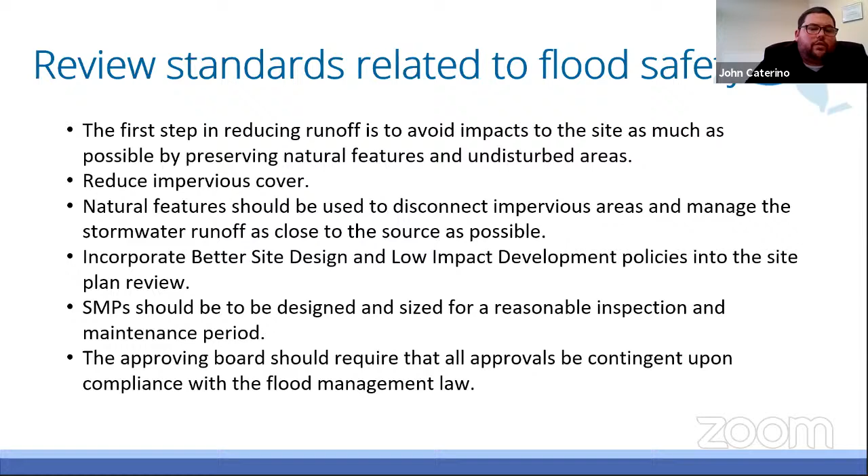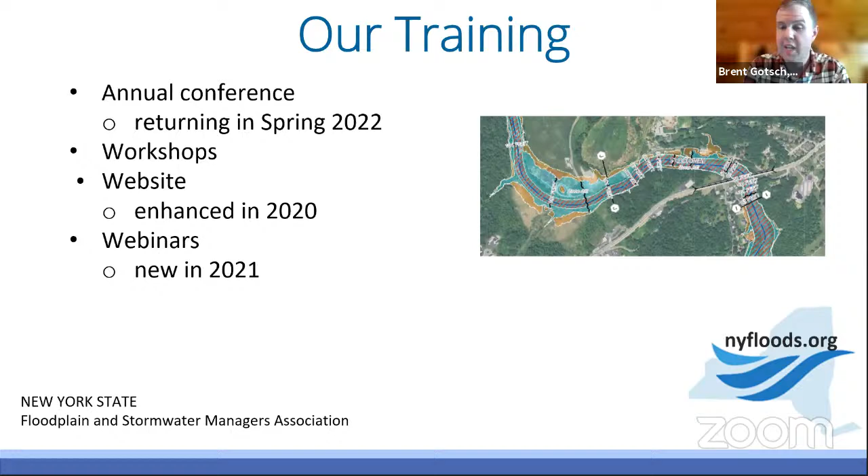Just to go back briefly to what Janet had mentioned earlier about no adverse impact, it is the civic duty of local governments to protect the health, safety, and welfare of the people who are served.

This is not something that happened within the last few years or even last century. This goes all the way back to ancient Roman law. So this is a very sound legal basis to it.